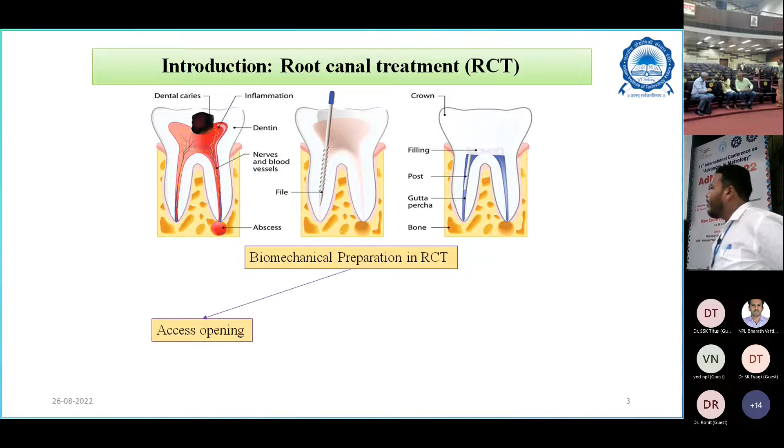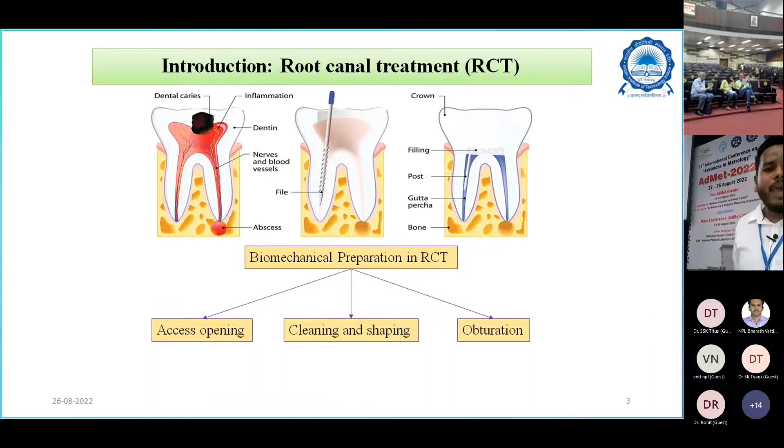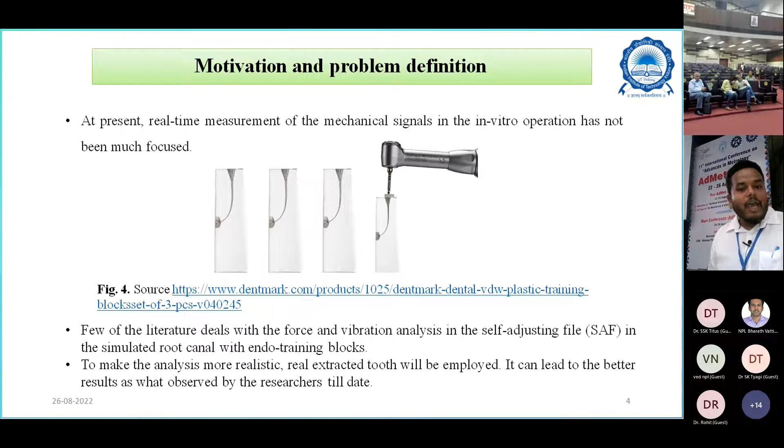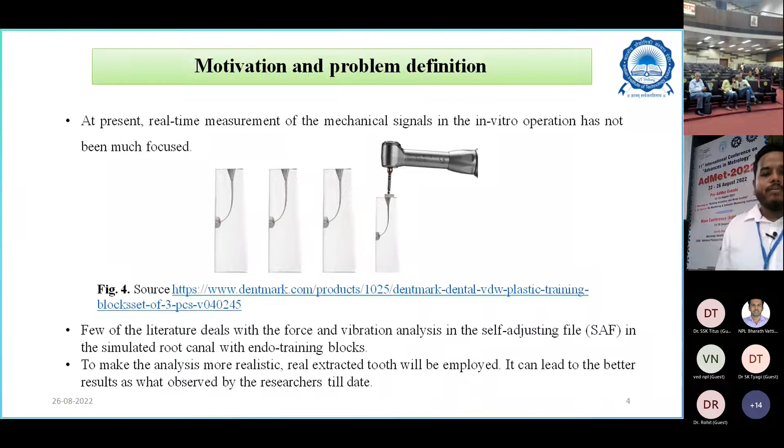Why am I doing this study? At present, real-time measurement of the mechanical signals in in-vitro operations has not been much focused upon, and few works deal with force and vibration analysis of endodontic files in simulated root canals using endo-training blocks. To make the analysis more realistic, a real extracted tooth will be employed, which can lead to better results than what has been observed by researchers to date.

Before performing the study, I conducted a systematic review of AI and ML in endodontics-related areas. Previous researchers have covered determining working length, locating apical foramen, retreatment predictions, prediction of periapical pathologies, detection and diagnosis of vertical root fracture, and assessment of root morphology.

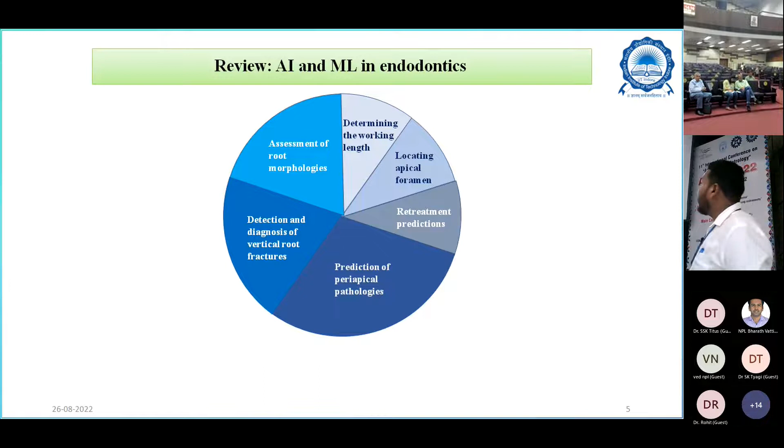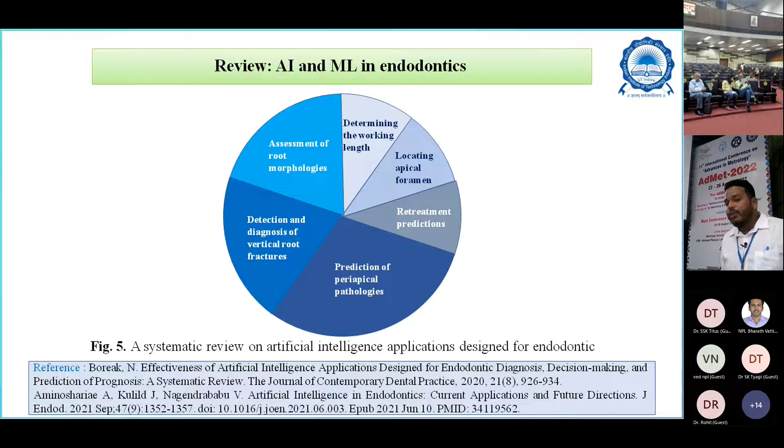So in our study, what are we using here. Initially during the RCT, root canal treatment, simultaneously I have acquired the signal through the accelerometer, and thereafter we have done the time domain analysis, and further we have used the continuous wavelet transform for time frequency domain analysis, and we obtain the images as a scaleogram.

This scaleogram I used with VGG16, the 16-layer pre-trained convolution model. Here are the few layers: the convolution layer, fully connected layer, and the pooling layer, as well as the softmax activation function. They predict, and we give the output of our study and work.

So in the previous part, I have shown you the workflow chart, how it works in our study.

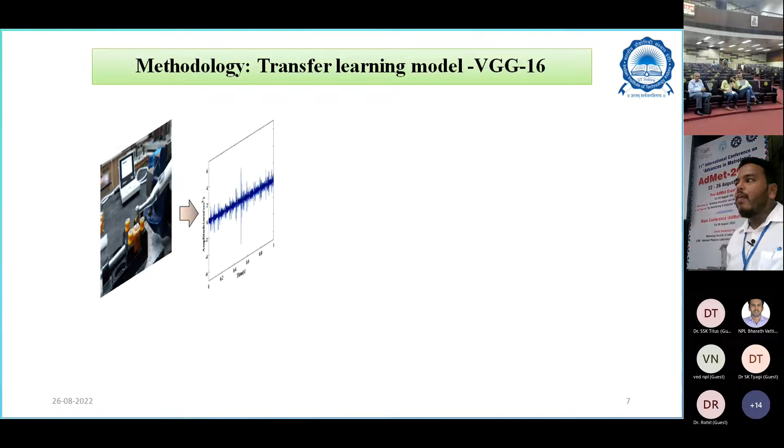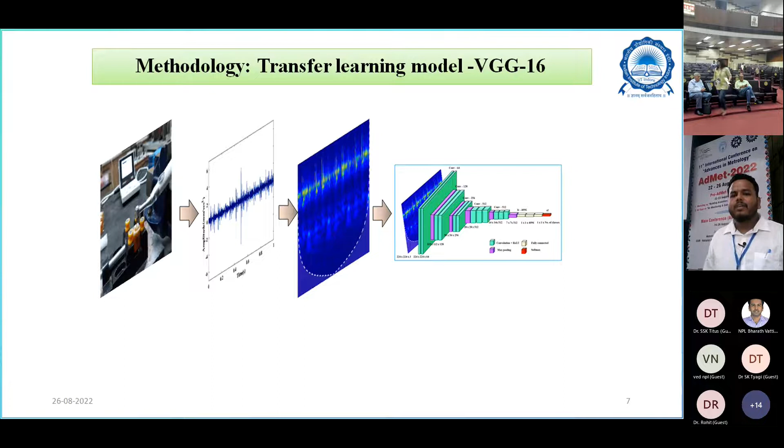Initially when we are performing the RCT, you can see the images of how it looks during the activity. Then after we acquire the signal, you can see the time domain image, the vibration signals, and thereafter I use the CWT technique, so I obtain the scaleogram. This scaleogram we use for the VGG16 pre-trained transfer learning model, and then I predict using this method for the prediction and classification of our work.

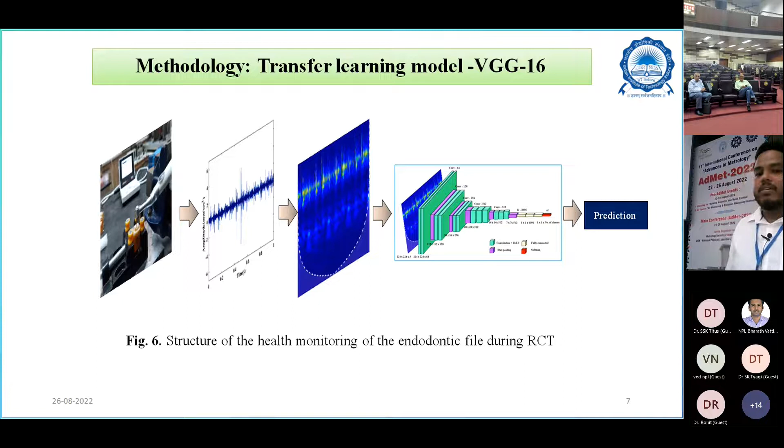So, how initially for the biomechanical preparation, how we have prepared our sample. Initially I have discussed the whole study and the motivation for the study, and now how we have prepared the sample for our work.

Initially I took human extracted teeth, following pre-ethical concerns for that. These extracted teeth have some germs, so they need to be healthy and clean, so you have to clean the human extracted teeth.

After cleaning with the help of hydrogen peroxide, here we have the setting powder and liquid. Simultaneously molding, simultaneously pouring into the mold. After pouring, after a few minutes, we put on the teeth because we require the holding process, since the tooth has a very unusual shape and we can't directly put it on as a workpiece. We have to make a mold as a mounting.

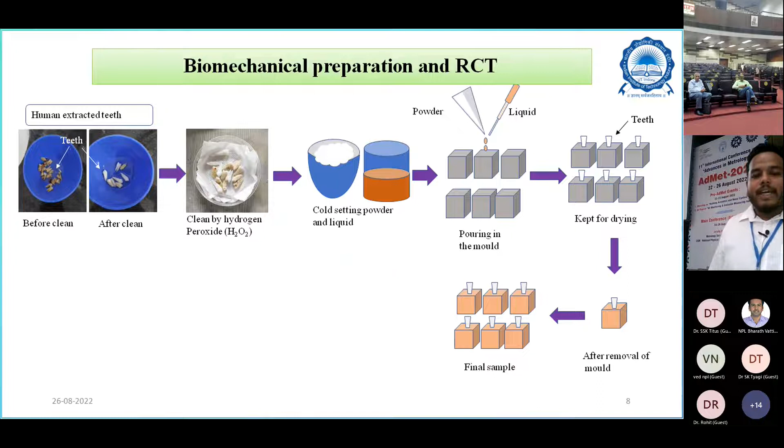So here we use the mounting process. After some time it will solidify, and after removal of the mold, we got the sample, and this is the final sample. After that we go for the biomechanical preparation, as I already told in the methodology process, and then here I've done the root canal treatment. So this is the whole process of how I prepared our work.

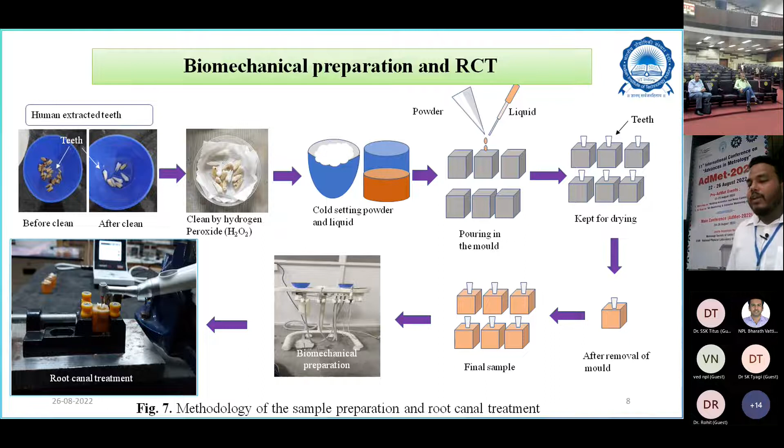So now the next work, how we acquire the data during the RCT. In the next work you can observe this is our experimental setup for the RCT. Here we have the endomotor hand piece, coupled with the endodontic file.

So after acquiring the signal, we are categorizing it into three different classes. After collecting the data from the accelerometer, I categorize and choose three different classes: healthy, moderate, and faulty signals.

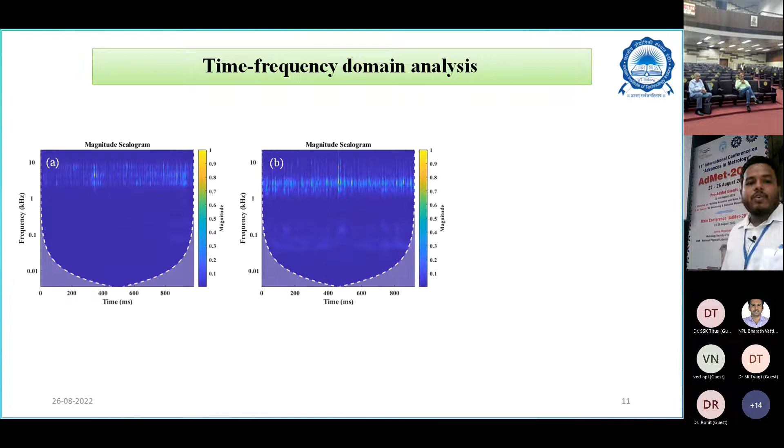And thereafter, after categorizing for the time domain analysis, I go for the time frequency domain analysis, because in this analysis we obtain the scalogram. So here I also observe the same three different signals: healthy, moderate, and faulty.

You can see in that figure clearly that the magnitude of the frequency is visually seen in the faulty file as compared to the healthy and moderate files. Then, after this, I have used these scalograms as images, a number of images from the three different categories. For these healthy, moderate, and faulty files, I have simply categorized the number of samples we have trained for the pre-trained 16-layer model, the VGG16 model. So these scalograms as images we have fed to the classification model.

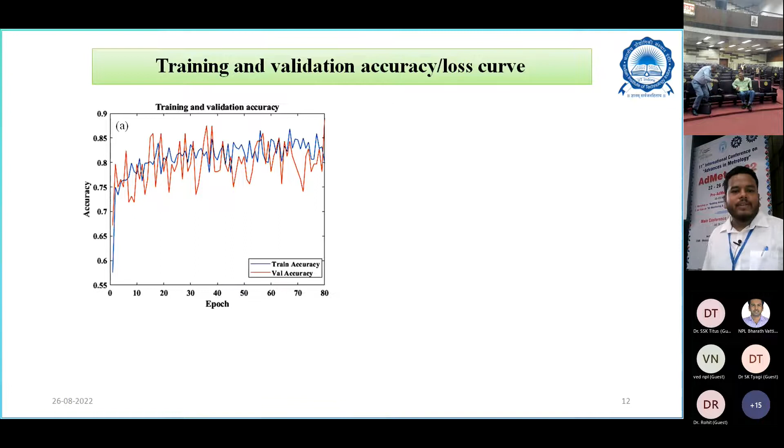After that, we got the training and validation accuracy and loss curves for the pre-trained 16-layer model. Here you can see the accuracy of that model: the red lines show the validation accuracy, and the blue the training accuracy, and the same for the loss curve. We observe the minimum loss from the model, and both the training and validation curves for accuracy and loss for the 16-layer model.

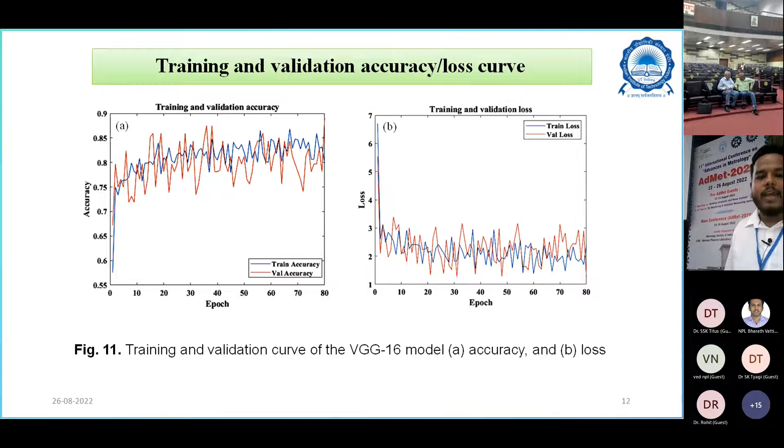So here I conclude my study. We have evaluated the proposed approach on the acquired signal, and the outcome exhibits the effectiveness of the transfer learning-based technique for the health monitoring of the endodontic instrument during RCT. In order to get the time-frequency scalograms from the RCT signal, the CWT is adopted as the time-frequency analysis approach. Moreover, the excellent accuracy in the classification serves as further evidence of the signal performance.

The classification result from the VGG16 architecture obtained around 87.33% training accuracy and 85.66% testing accuracy. According to the obtained accuracy, the technique can be effective for the health monitoring of the instrument during the biomechanical preparation of the root canal.

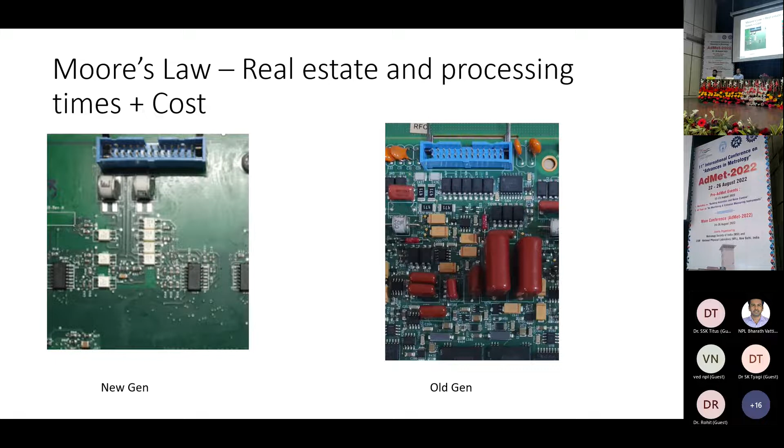A real life example: the right side figure shows the old generation of electronics. Old generation these days could actually change in 3 years. And the new gen actually shows all of that really converted into software, which really brings in my real estate requirement, my infinite capability to develop huge processing times at a minimal cost. So this is a real life example of how our products have been really changing using these hardware design capabilities, the semiconductor capabilities, and the processing speeds.

The convergence of all the technologies we talked about before has really helped this Internet of Things, all these things connected, which can give accurate temperature up to 0.1 degrees C, and in extreme temperatures, over a period of time. So this is a real life example of how Internet of Things has helped our measurement capabilities for the medical and the pharma industry.

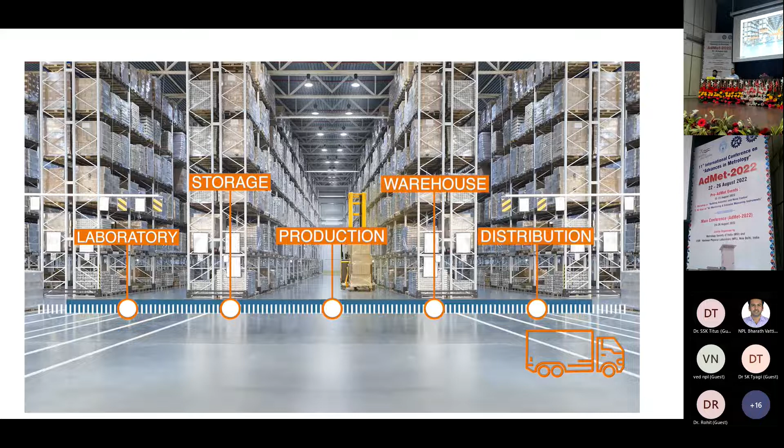These are mission critical applications, and we need to ensure that the temperature in which this material is stored, could be a vaccine or drugs, is as per the FDA regulations. So this is one of our technologies where we have harnessed all these capabilities, and now this data can actually be seen on any device.

Earlier we had a limitation that the device has to have an LCD or a disk or some kind of memory device. Now it has gone delinked. You actually don't have to see it on the device. You can see it on your mobile, you can see it on your computer. The platform has moved from on-premise to anytime, anywhere, without losing any of the efficiencies, accuracies, and regulatory requirements.

While we have done all this, the next thing which is really going to help us is how engineering is going to be leveraged in terms of 5G. With the hyper connectivity that 5G will offer, one of the benefits we have already started looking at is how small devices like sensors can use the large bandwidth available to transmit data. Until 4G, it was overkill to use that kind of bandwidth to have sensor data move across the networks.

But 5G will give us the flexibility to have narrow band available for the Internet of Things. So that's a convergence or an evolution, whichever way we look at it, to help small devices where it is unaffordable to use large bandwidths, but use the 5G pipe to have narrow bands to transmit or leverage the network for our Internet of Things. So this is an ultra low latency which we envisage, and that is going to leapfrog mission critical applications and their usage.

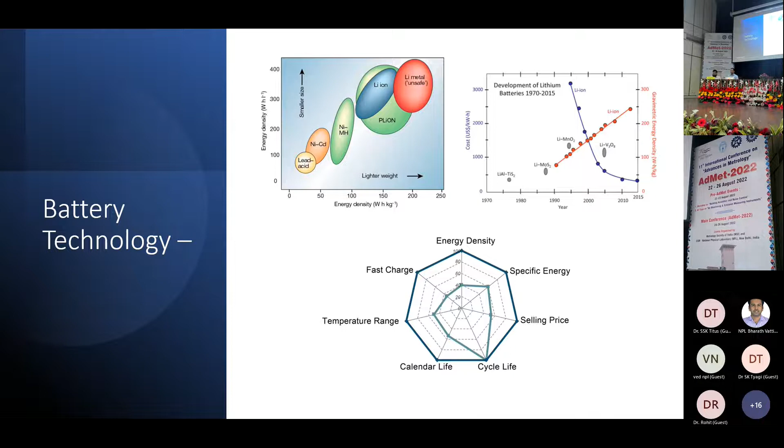The last slide: while we did all this, the Internet of Things, the cloud, Moore's law, and the mission critical application and the engineering that goes behind, one thing which is most important and a contributing factor is the battery. All of these devices require very high density batteries, which can be at a very low cost and do many more cycles. So here is where the contribution of lithium batteries has come in for all the Internet of Things that we see today. So that's it on the presentation, and thank you.

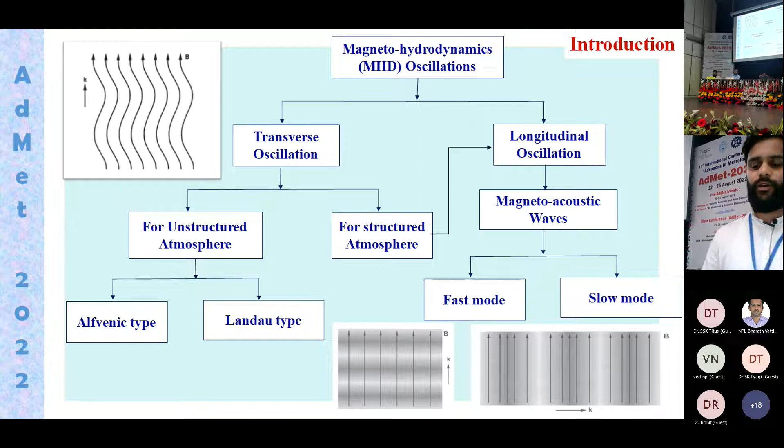So our basic aim is to explain here the slow mode; the Alfvénic type, Landau, and fast mode we have done previously, that we have published already. So these are our observational findings and motivation.

So in this slide, we have seen that there are many observations regarding the Alfvénic wave detection in solar corona. This particular paper represents the observation on the solar coronal surface. They have detected the large scale observation within the last 2 decades, and they find that the amplitude that they observed is of very less amplitude, around 0.3 kilometers per second, and it has less energy to heat the solar corona.

But after that, in the next slide, we have the observation that is in the chromospheric region and in the transition region. Transition region is the region that is between corona and chromospheric region. From these two observations, we have seen that the detected Alfvénic waves have enough amplitude, of 20 kilometers per second, and have enough energy, 10 times from the previous one that we detected on the solar corona. So these waves have enough energy.

And for the slow mode, these are the transition region waves that we have detected. After that, we have seen the fast mode and slow mode waves, and some published papers signify the non-uniformity in the pattern they have developed for the thermal misbalance, using dissipative terms like viscosity, thermal conductivity, and calculating the phase mixing pattern. But they are doing it for the slab model. So on the basis of these

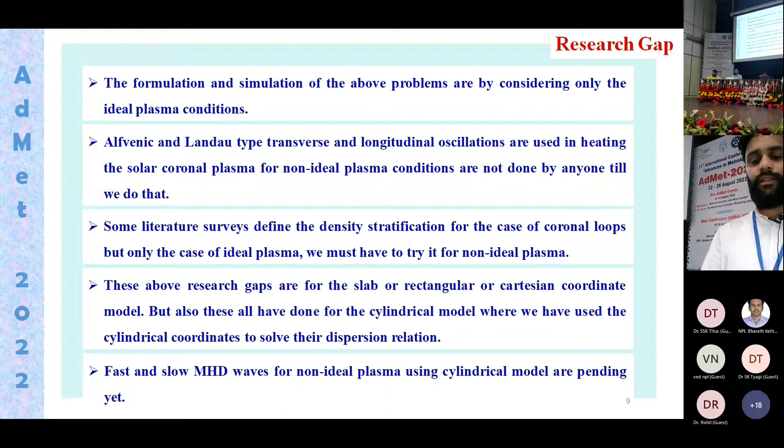So on the basis of that, we have designed our proposed work. We are doing the slow mode and fast mode MHD waves for a cylindrical model using dissipative terms like viscosity and magnetic diffusivity, the transverse oscillation for incompressible, and the linear polarization for MHD waves on the basis of non-ideal plasma. The above three or four proposed works we have already published. Our focus is on the last, the effect of slow MHD waves to heat the solar corona using dissipative terms.

So these are our publications, and this is the abstract we have started with.

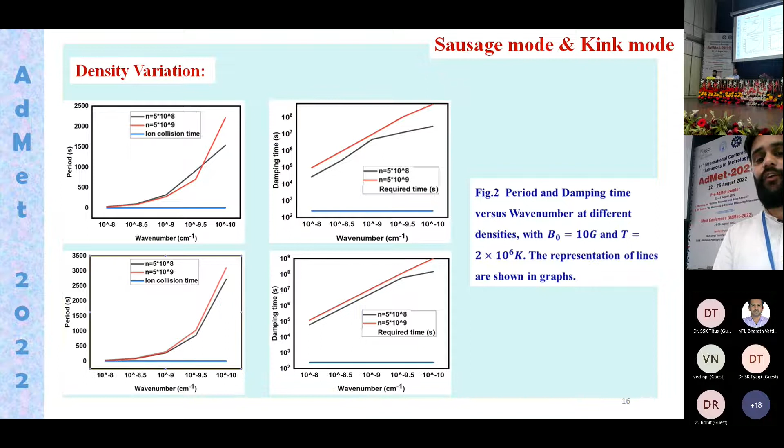So in this slide, we have seen that the period and damping time of all these density variations are going to increase, and the required time is far below these observations. In the temperature slide, there is the same pattern. From these two patterns, we have seen that in the slow MHD modes, the wave does not have enough energy to heat the solar corona. But compared with the slab model, in the case of the slab model it is far below the required energy, but in this case we are very close to this energy.

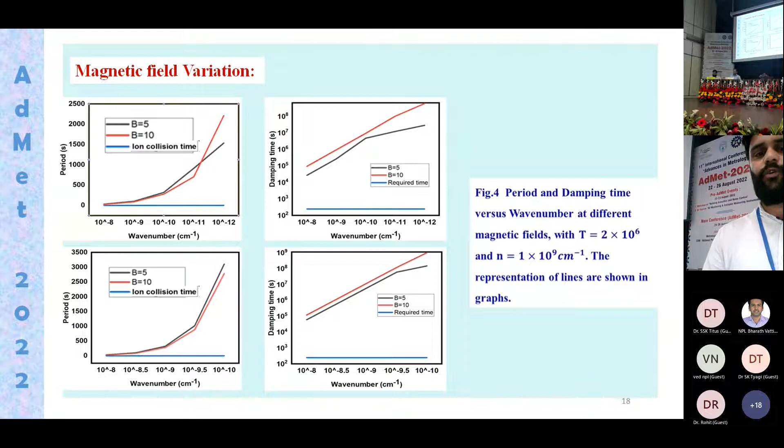So basically our conclusion here is that the cylindrical model is more beneficial than the slab model. So we are using this model and we predicted these waves, and we have enough energy to heat the solar corona. Fast mode has enough energy to heat the solar corona, but slow mode does not in the case of the slab model. But in the case of the cylindrical model, these waves have some energy to heat the corona using dissipative terms. And we have some references on this after that.

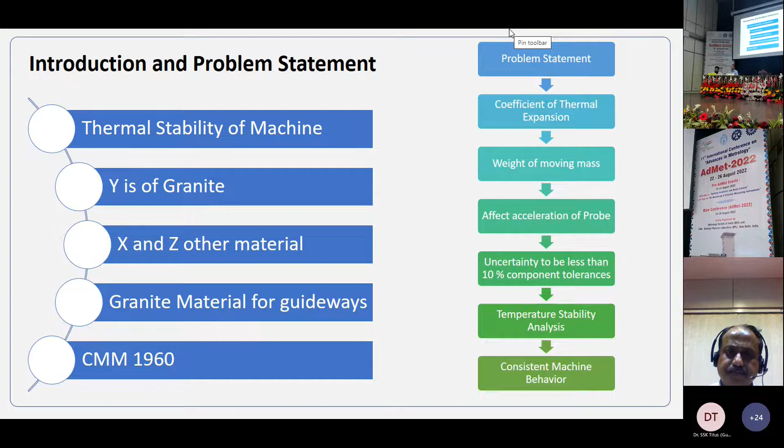The problem context throughout the mechanical industries for measurement is the correlation of the measurement, the repeatability, the reproducibility, and the dimension differences between two machines, two environments, two places, or two different materials. So this study explains all the challenges and outcomes as a solution based on what we studied practically in a real manufacturing setup.

Basically, the issues and challenges seen in industries are repeatability on the same machine, reproducibility when the time span is changed for the measurement, and environmental conditions when the measurement is done in-house versus at a different customer's place. The challenge is to find the correlation in measurement, and this is mainly because of the thermal drift of the environmental condition, the machine, and the part configuration.

This paper would give a valuable output to industry, not only Indian industry, but across the globe, wherever the metrology room is equipped with high precision measuring instruments and the part tolerances worked with are very tight.

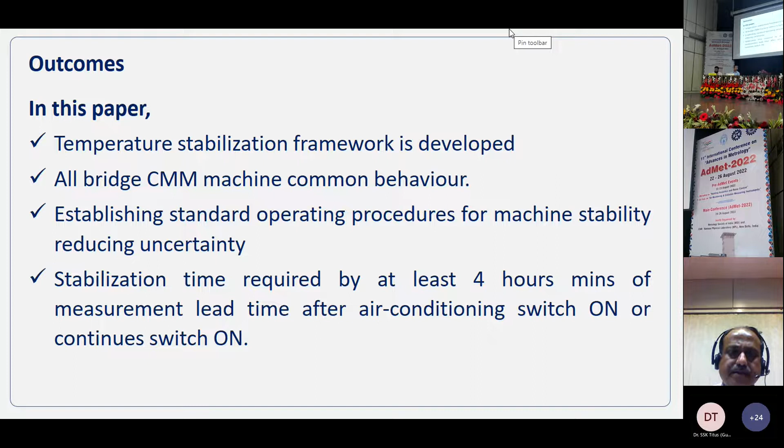When we switch on the air conditioning in the morning, it is recommended that the metrology room should continue with air conditioning on all the time.

So here, in very detailed literature review, we have shown this. Because of time constraints, it is better to go with the major important model of this paper.

We selected three kinds of machines, three models. Two are Indian make: Spectra 8106 and Spectra 564. Also, the variant is kept on the machine for the probing system: a scanning probe that continuously measures, and another is point to point touch trigger measurement.

To build confidence in the research, we have also included an imported model, Italian make, of almost equal size: 800 by 600 by 600. This gives us confidence that the machine make, the place, or the model doesn't make any difference.

Actually, what this study shows, as the problem statement says, is that measurement done at one machine at one place differs at a different one; or on the same machine, repeatability and reproducibility show no consistency. So measuring parameters in our cycle time of measurement is done without any part.

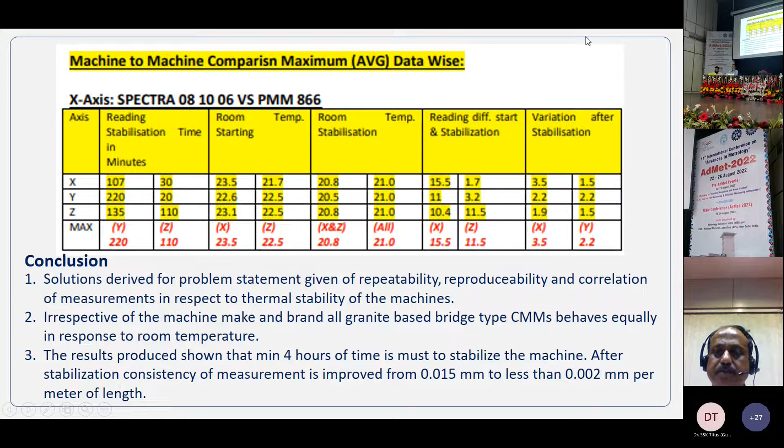Hope it is well informed, and any questions can be addressed, sir. Thank you.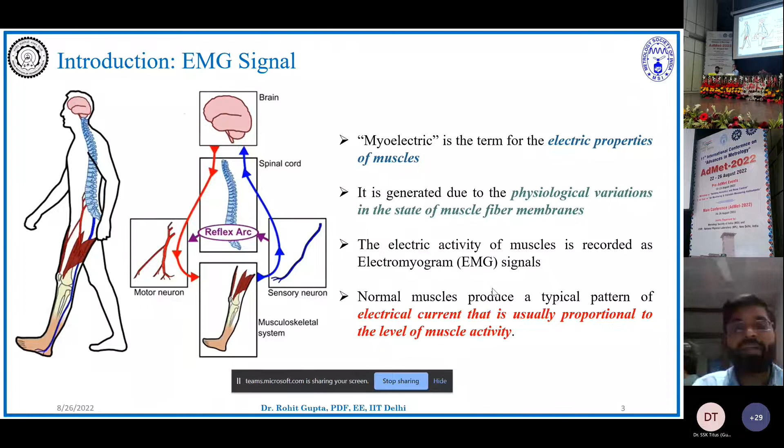So for normal muscle, it produces a typical or regular pattern of electrical current that is usually proportional to the level of muscle activity. So to acquire the sEMG signal or the EMG signal, we can use two types of electrodes.

One is IEMG, intramuscular electrodes, also known as needle electrodes, which are used invasively. A needle type electrode is inserted into the human body through the muscle. The second type of EMG electrodes are the surface electrodes, which are used non-invasively over the surface of the muscles. So these are the non-invasive type of electrodes.

So for our research purpose, we normally use this type of electrode, and in this particular study we have used these surface electrodes. Whenever we use surface electrodes, the EMG is also referred to as the sEMG, that is, the surface electromyogram.

So the general block diagram to design a system to acquire the EMG signal is like this: there will be an external circuit which consists of the protection circuit and the basic filtering part, which reduces the environmental noise. Then amplification of the acquired signal will be done, and its conversion into digital form. For the amplification and digital conversion part, we have used the ADS1298 IC.

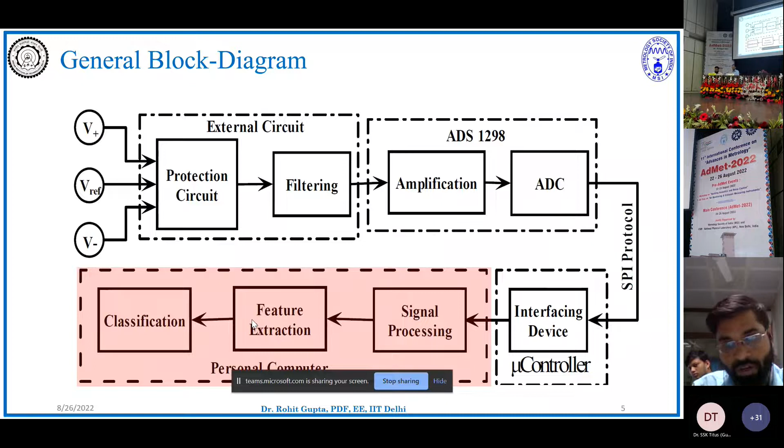And if we want to make some decision depending upon the acquired signal, we go for the machine learning part, which consists of feature extraction, filtering, pre-processing, and classification. So we have modified this generalized block diagram as per our requirement.

So in the block diagram we have used here, we simply take the sEMG electrodes, that is, the surface electrodes. We have used the ADS1298 IC to amplify the signal, convert that analog signal into digital, and transmit it to the microcontroller. Then through USB, we store it in LabVIEW or MATLAB. For this particular experiment, we have used LabVIEW.

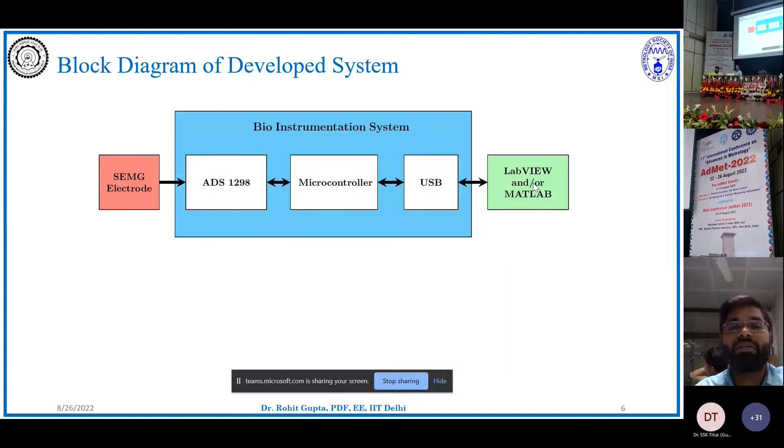In LabVIEW, we have designed the graphical user interface so that the desired parameters for the experiment can be set. So what is the advantage of using the ADS1298 IC? The major advantage is that it is an 8-channel IC with a preamplifier, that is, programmable gain we can define in this IC.

It has a 24-bit ADC and a variable range of sampling rate, depending on our study. For this particular study, we have used 2048 samples per second. It consumes very little power, 0.75 milliwatt per channel, so depending upon how many channels we are using, the power consumption goes down.

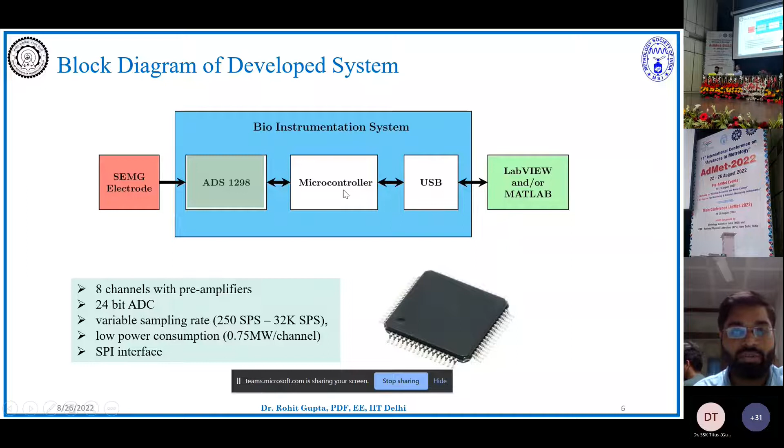It uses the SPI protocol to interface with the microcontroller, so only 4 pins are used to interface this IC to the microcontroller. So this is the circuit diagram which we have designed. Here we have a pre-filter circuit which is used to discard the environmental noise. Apart from that, these are the connections, and this is the port where the microcontroller is connected.

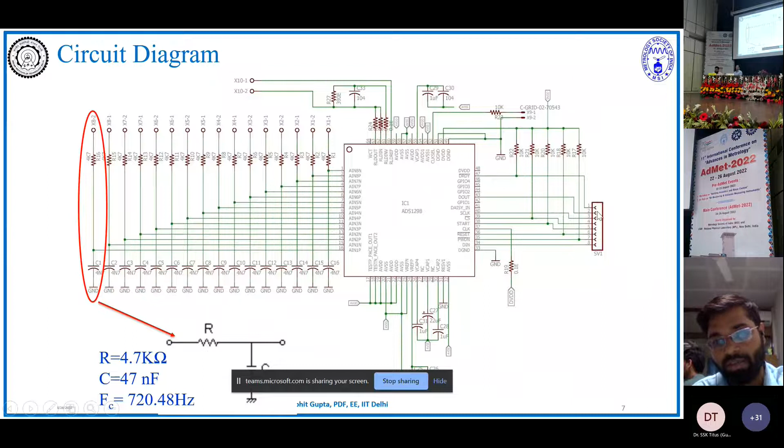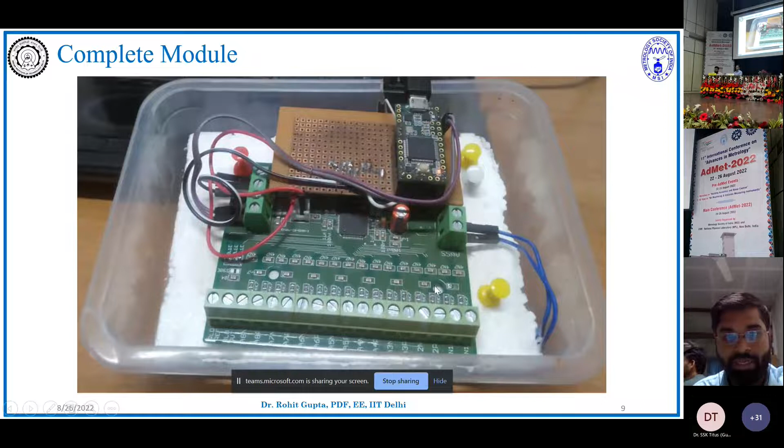So this is the PCB which we have designed, this is the assembled PCB, and this is the complete module which we have developed in our lab. Here is the microcontroller part, this is the designed PCB, and this is the ADS1298 IC. To connect the microcontroller to the ADS1298 IC, only 4 connections are required.

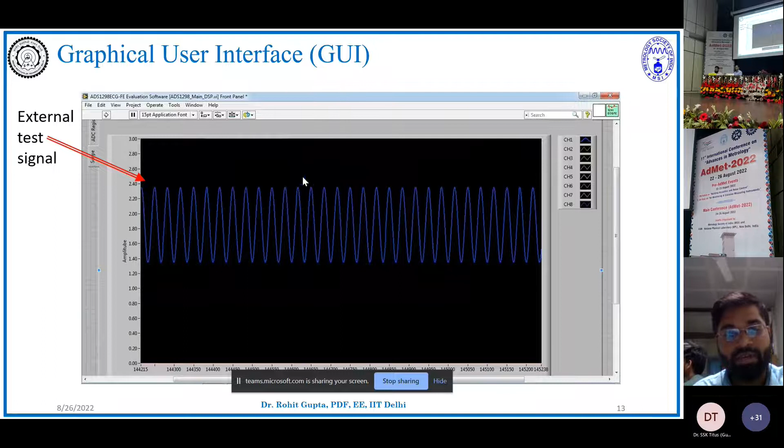So this is the test signal which is generated internally from the IC. And this is the external test signal, a sinusoidal waveform we have given to the input side, and the same we have obtained at the output side. Similarly, this is the test EMG acquisition for a particular activity acquired from one muscle.

So what are the major uncertainty parameters which we have to consider while developing any hardware related to the biopotential? So one uncertainty can be due to the power supply end. So in this particular prototype, we have used two voltage regulator stabilizer ICs at different stages, one at the ADS 1298 IC stage and one at the microcontroller circuit board.

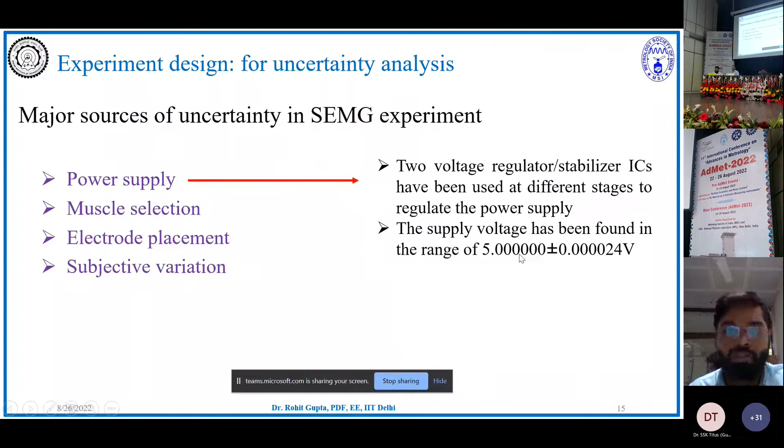So we have measured the power supply for this particular prototype in our lab. So repeatedly, like 10 to 12 experiments, and we have averaged those values, and we have found it is pretty much very close to the 5 volt, which is required for this prototype. And second is the muscle part or the electrode placement part.

So one can select a particular muscle and place the electrode at the same muscle, but because of human error, or we can say because of muscle localization error, there may be certain uncertainty between the previously selected muscle and the currently selected muscle. Even the person who is conducting the experiment wants to select the particular location or particular muscle each and every time, but still there is some uncertainty during the electrode placement.

So that is considered in our study by taking the different trials, and for each trial we have placed the electrode again and again individually. And to address the uncertainty due to the subject variation, we have conducted the study on 10 subjects. So the experiment protocol is like this.

We have considered 10 subjects who have participated in the study, and for each subject, the sEMG signal has been acquired for 10 different trials. So for each trial, the electrode has been placed on the same muscles individually. So for this experiment, we have considered 4 types of hand motion: hand close, hand open, wrist extension, and wrist flexion. These are the 4 major hand motions which should be mimicked with the prosthetic or the robotic arm.

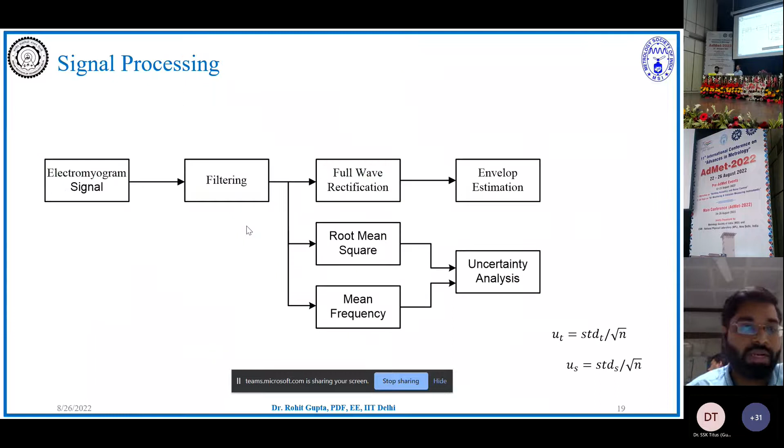We have acquired the EMG signal at the sampling rate of 2048 Hertz. Then it is filtered using a 4th order Butterworth band pass filter in the frequency range of 10 to 450 Hertz. Then it is full wave rectified, and the envelope of the signal has been detected using the 4th order low pass filter with cutoff frequency of 5 Hertz.

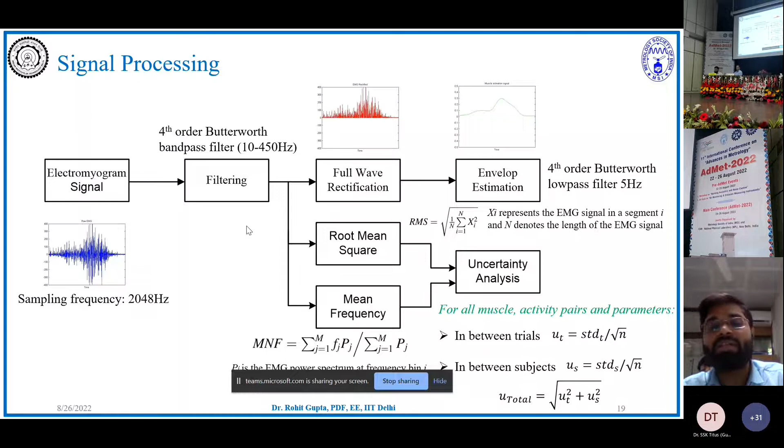For uncertainty analysis, we have estimated 2 parameters. One is a time domain parameter, that is root mean square, and the other one is mean frequency. And for uncertainty analysis for all muscle, activity pairs and parameters, the in between trials uncertainty and the in between subject uncertainty have been estimated using these formulas.

So if we come to the conclusion, in this study, we have designed the multi-channel portable cost-effective EMG acquisition system, and we have also tested its accuracy. For the commercially available acquisition systems, the uncertainty shown is 2%, and we have found the uncertainty for our developed system very low with respect to commercially available systems. And the repeatability of the RMS value and the mean frequency within the subject has been found similar, with no statistically significant difference.

We have applied one-way ANOVA, and the p-values are found greater than 0.05. And also, the uncertainty shown by the mean frequency is more prominent as compared to the RMS value for each and individual experiments. So these are the conclusions drawn from this study.

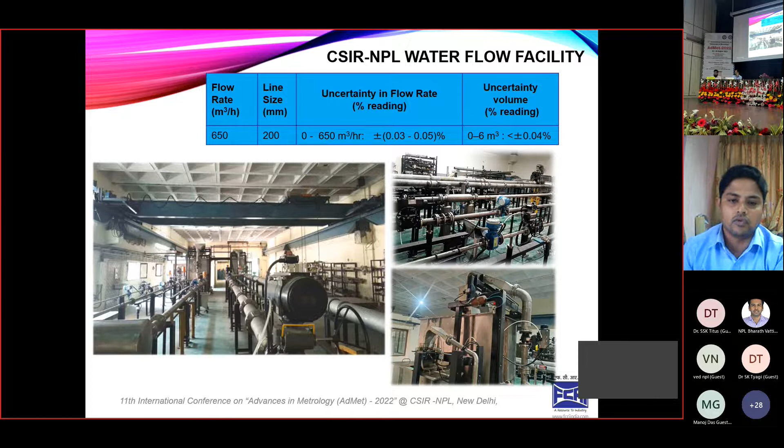And the uncertainty in the flow rate measurement from minimum to 650 meter cube per hour is 0.03 to 0.05%. And the uncertainty in volume is claimed as less than plus or minus 0.04%. This lab uses weighing balances of 6,000 kilogram, 3,000 kilogram, 300 kilogram, as well as 12 kilogram for small measurements.

The water flow laboratory is a specialized facility of FCRI. It is a specialized test rig for the precise calibration of flow meters, testing of valves and other flow products. The whole system is designed to handle a maximum flow rate of 4,500 cubic meters per hour through pipelines of size up to 600 mm.

Here, as at NPL, the diverter method is used for the flow measurement, and you can see the snapshot of the diverter system and the test lines starting from 6 inch to 24 inch, or 600 mm, and even expandable to 900 mm. We are using the gravimetric system of up to 2,500 cubic meters per hour with an uncertainty of 0.1%. Above that, a secondary system is used, which has an uncertainty of 0.15%.

In case of volume measurement, up to 20 cubic meters, the uncertainty is plus or minus 0.05%. Here we use weighing balances of 300 kilogram, 2,000 kilogram and 20,000 kilogram systems, and even smaller 60 kilogram and 2 kilogram weighing systems.

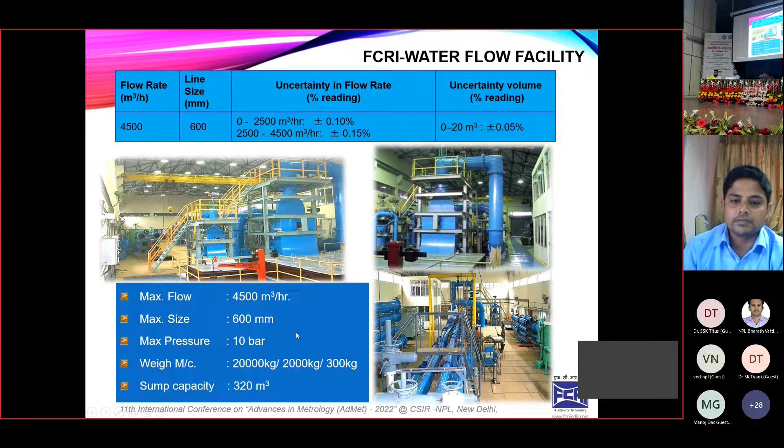The oil flow laboratory has the capability of calibrating any type of flow meter, but the aim was the calibration of flow meters used for total volume measurement, like positive displacement meters, turbine meters, master meters, etc., which are used to determine the total quantity of fluid. This facility makes use of the static gravimetric method, and calibration is performed, as you see in the figure, by the standing start and stop method.

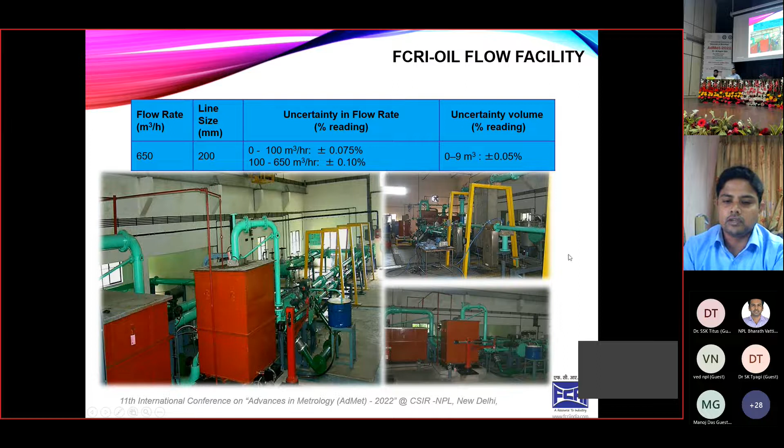This facility has a maximum line size of 200 mm and a maximum flow range of 650 cubic meters per hour. The maximum uncertainty is 0.1%, and the volume determination uncertainty is 0.05%. You can see one of the master meters of 6 inch assembled in series in the test rig, and higher sizes of around 12 inches and 8 inches assembled in the loop. This facility uses the standing start and stop method for total volume flow measurement.

Regarding the selection of the artifact, a 3-inch master meter was selected for this ILC program. The basic principle of this meter is to precisely measure the mass flow of a fluid by vibrating the fluid-conveying tube at its resonance frequency. At flow, a phase shift between the two tubes occurs, which is directly proportional to the mass flow. Separately and independently, this meter can also measure density. With these two parameters, mass flow and density, the volume is measured.

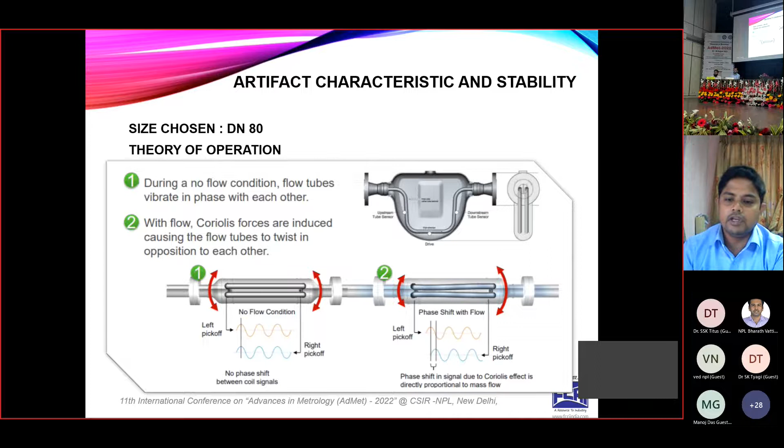Because of this inherent accuracy, minimal maintenance cost, and absence of moving parts to wear out, these meters are used in a wide range of applications. For a valid ILC comparison, it is essential that the artifact does not significantly change its measuring characteristics from the time the reference laboratory calibrates it to when each participant laboratory undertakes the measurement. Due to its positive characteristics and stability, this was used as the artifact.

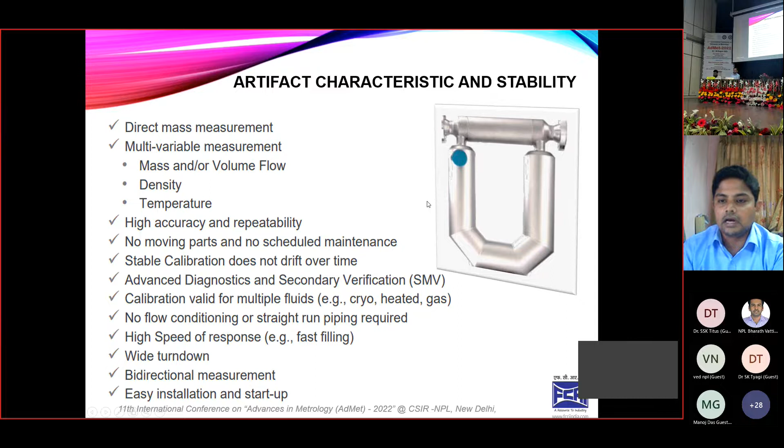Before starting the calibration, the accuracy and validity of all instruments was verified, and to establish the traceability of the system and assign the corresponding measurement uncertainty, the individual uncertainty sources were thoroughly evaluated: the weighing balance, the timer, the temperature, the density, and the timing error of the diverter, which is the main significant component of the uncertainty. Every effort was made to reduce the diverter timing error to improve the overall accuracy of the measurement at each lab.

Before this, NPL determined the timing error uncertainty at least at 3 or 4 flow rates, three times each, for the estimation. Initially water is filled in the meter, and it is allowed to warm up for at least 1 to 1.5 hours. After that, the downstream valve is closed and the meter is zeroed for any bias. The meter is defined with a pulse factor, or K factor, in pulses per kg.

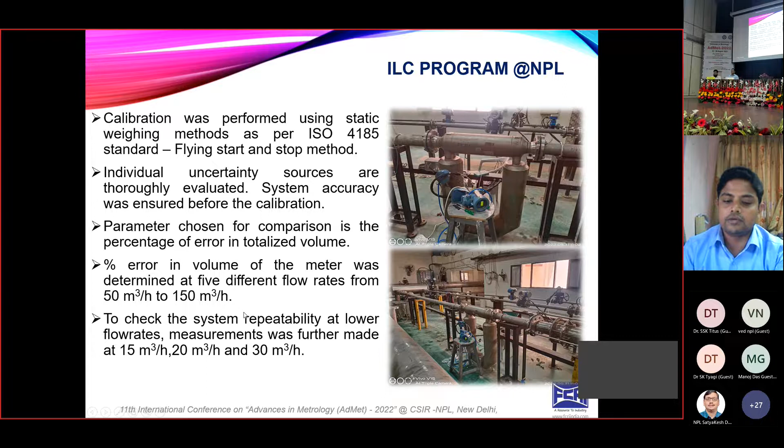The criterion for this ILC test is the EN value, which is used to assess the measurement equivalence between the reference testing laboratory and the participant laboratories. EN ratios are calculated using a statistical technique: the difference between the lab result and the assigned value, divided by the RMS value of the uncertainties reported by the participant laboratories and the reference laboratory.

As per the NABL guidelines, EN should be less than or equal to 1, which shows that the results are satisfactory. If it is greater than 1, then we have to repeat the whole process and go for root cause analysis. But it should be noted that these inter-laboratory comparison programs are not trying to determine which